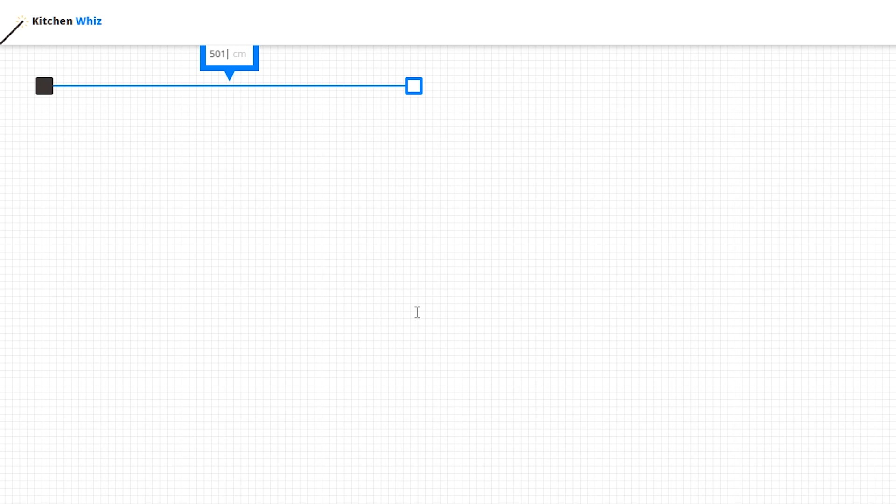Our room is bigger than 6 meters, so we are going with big scale. I'll click once, type the dimension of the first wall, which is 966, then click enter. The next wall is 621. Click enter and close the shape of the room.

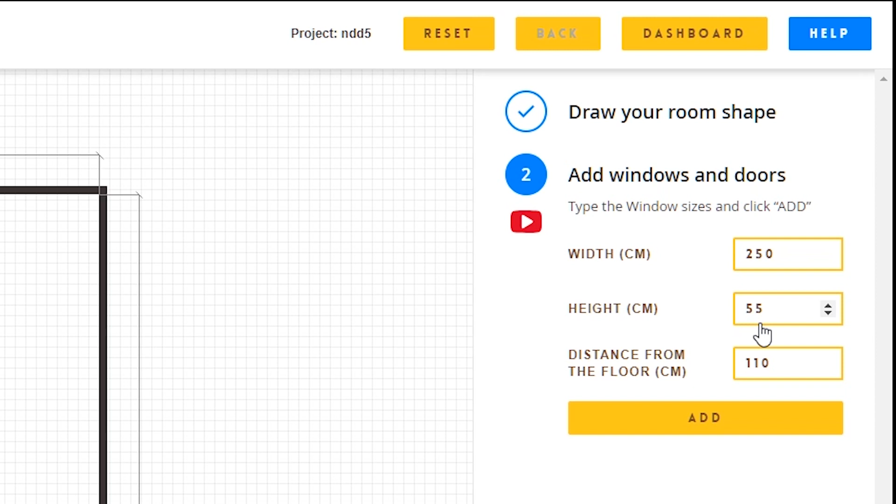Next, we're gonna add the windows and doors of the room. We have one window that is 250 centimeters wide and 55 centimeters in height, 110 centimeters from the floor, and it's 179 centimeters away from the wall here.

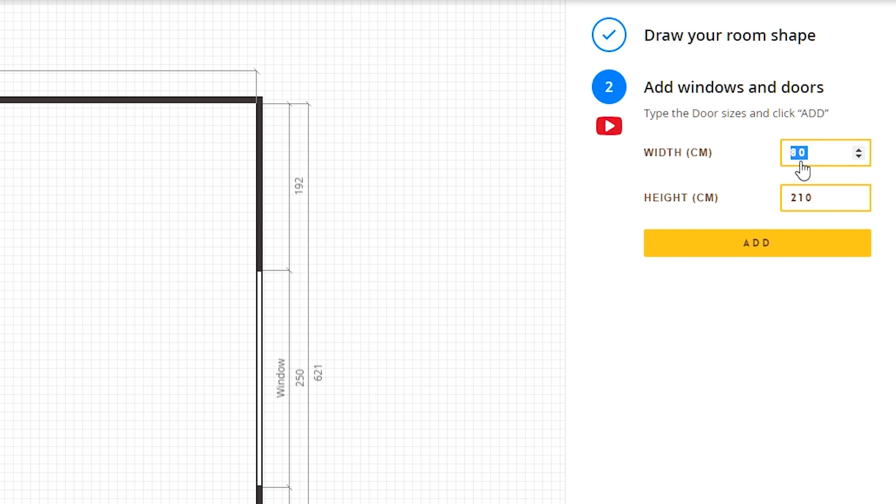Then we have two balcony doors on this wall. I'm gonna click create doors, click the balcony doors option, add 465 centimeters for width and 250 for the height, and place the one balcony door here. The second balcony door has the same dimensions, 465, 250, and I'll place it right next to the previous one. Click save.

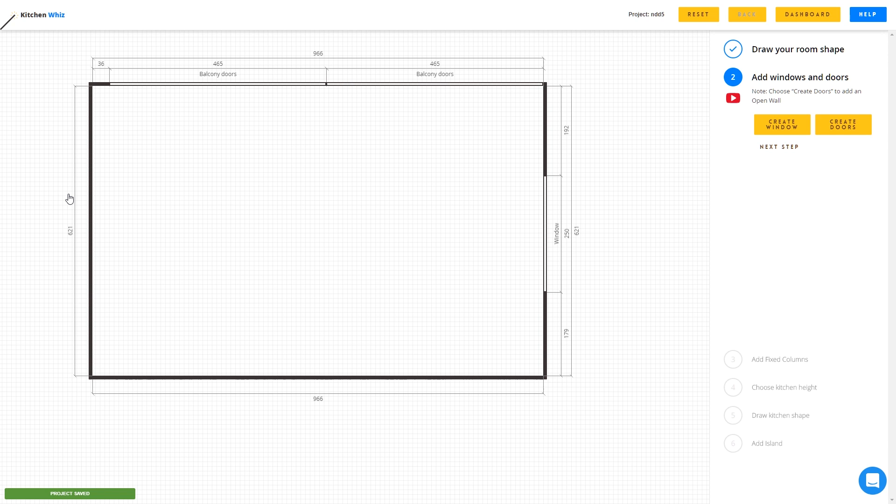I'm gonna make this into an open wall. I'll click create doors, click open wall, and add the dimension, which is 621 and 270, the height of the room. I'm gonna add the open wall here.

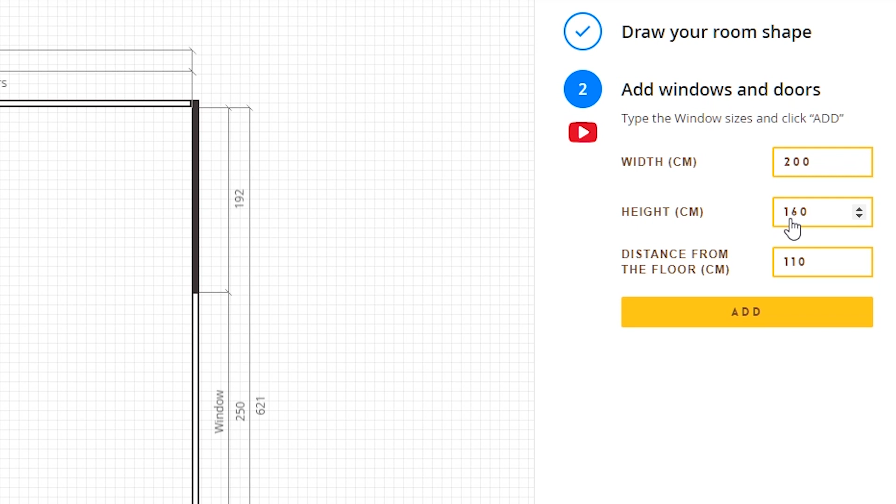Finally we have one more window that is 200 centimeters, 160 centimeters in height, and 110 centimeters from the floor. This window is 315 centimeters away from the wall.

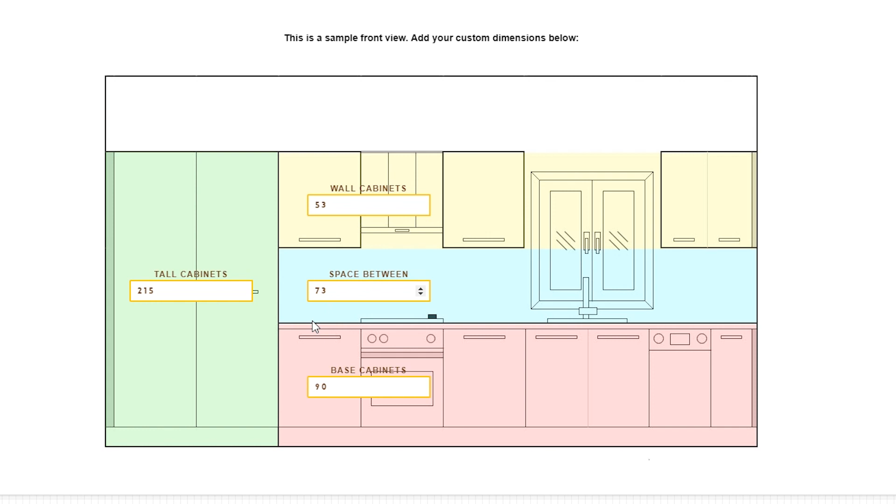We can now move to the next step. We don't have any fixed columns in the room. We're gonna go with custom heights for our cabinets. The wall cabinets are 53 centimeters, the space between is 73 centimeters, and the base cabinets are 90 centimeters.

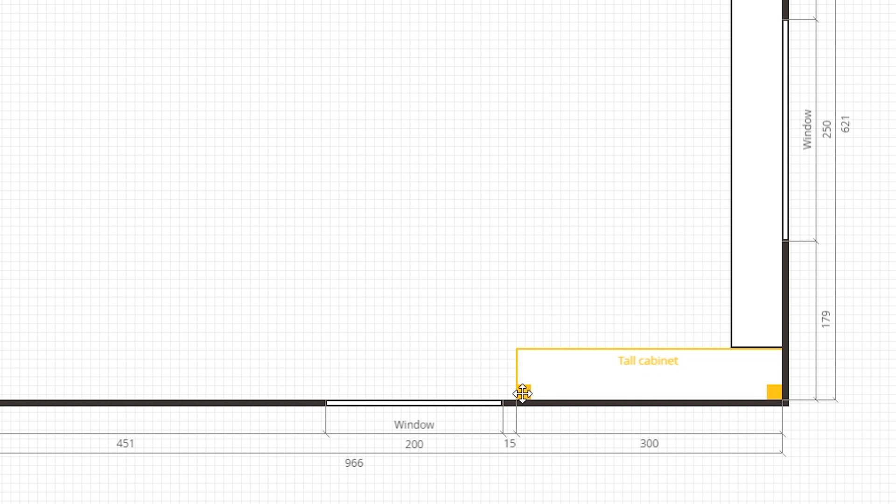I'm gonna click next and start drawing the kitchen shape. I'll start with the tall cabinets and then add base cabinets here, leaving around 1 meter from the balcony door. For the tall cabinets, I want to leave some more space here, and finally add the wall cabinets on this wall above the window.

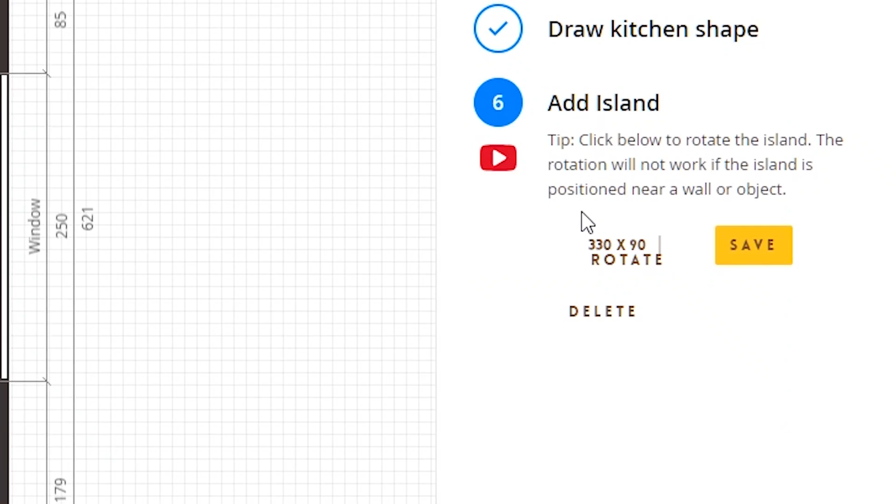Next, I'm gonna add one island that is 90 centimeters in depth and 330 centimeters in length. I'll rotate the island and place it here.

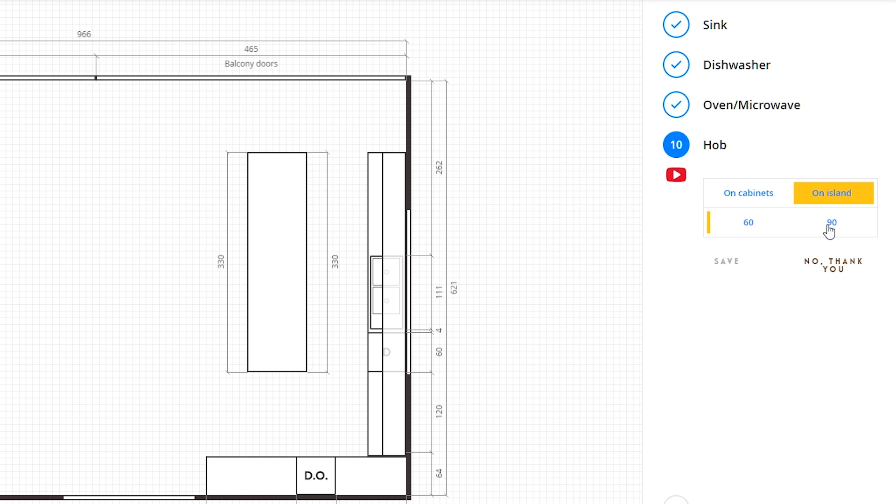Next, I'm gonna add the sink with two bowls right under the window, a dishwasher right next to it, a double vertical oven on the tall cabinets, a hob on the island, a hood right above it, and the fridge on the tall cabinets. By adding the fridge here, we get a red triangle, which indicates that the main appliances in the room are too far away from each other.

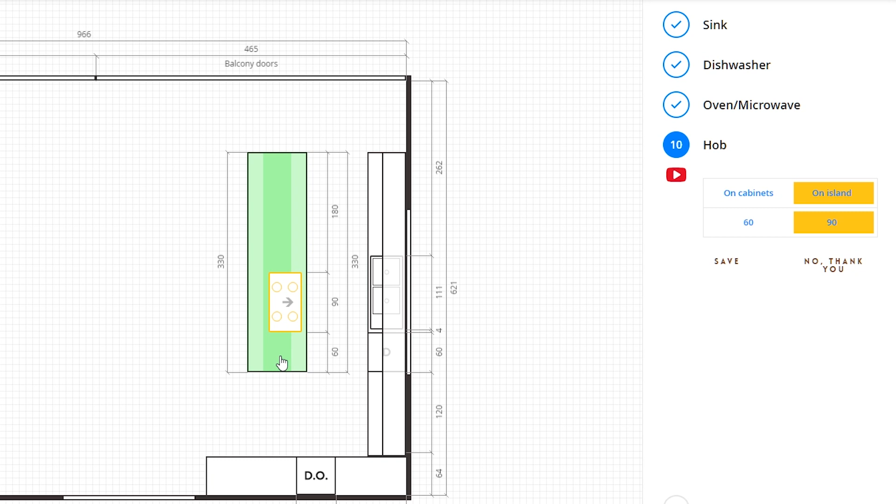So what I want to do is go back to the hob and move it a bit closer to the fridge, to the tall cabinets. I'll add back the hood, and let's try this again. When I move the fridge to the left, the triangle turns green and everything is in the correct distance.

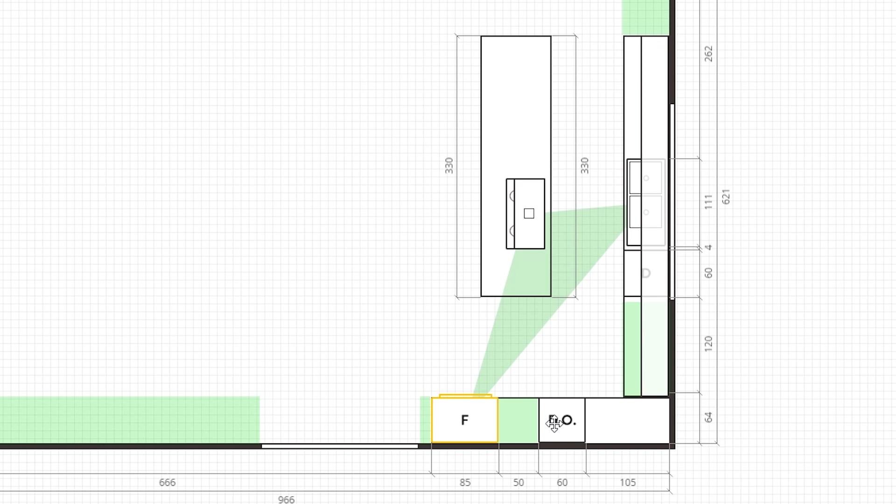If I place the fridge here, the space between the fridge and the ovens is 50 centimeters, but because this cabinet will be 45 and we want things to be symmetrical, I'm gonna move this 5 centimeters to the right, then click save.

I'm gonna skip the washing machine. Now our front views are generated and we can check them out with the minimap here.

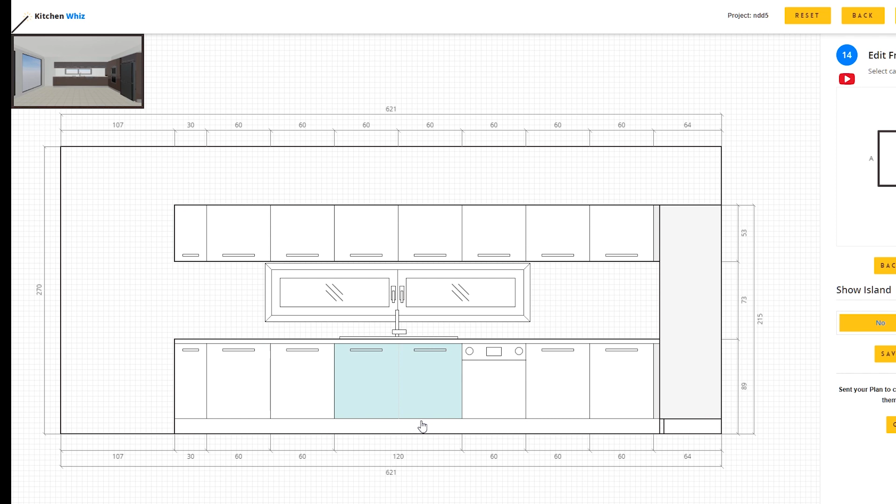The tall cabinets look okay, so what we want to do now is split and merge the cabinets here on this wall and then make this into glossy white for all cabinets.

First I want to split this cabinet in half so that I can merge these two and create a 90 centimeters cabinet, and do the same with this one to create a 60 centimeters cabinet.

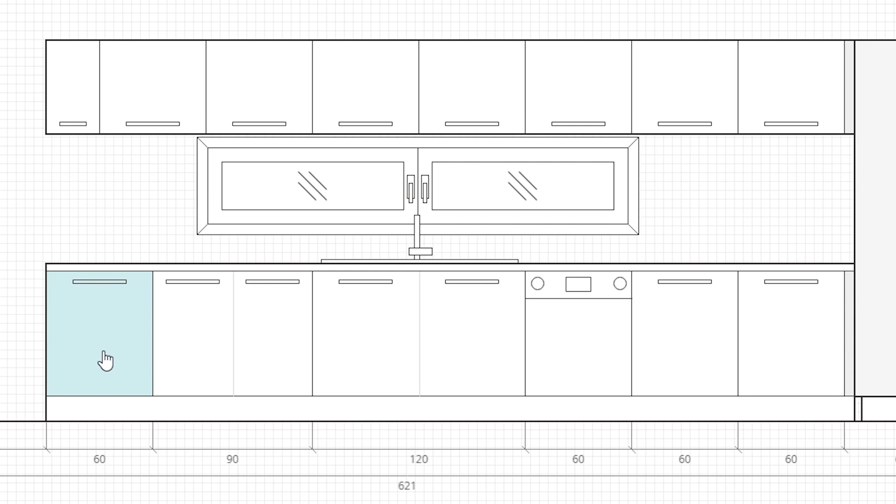I'm gonna change this to drawers and leave it with this type of drawers, and then all is left to do is split and merge the wall cabinets.

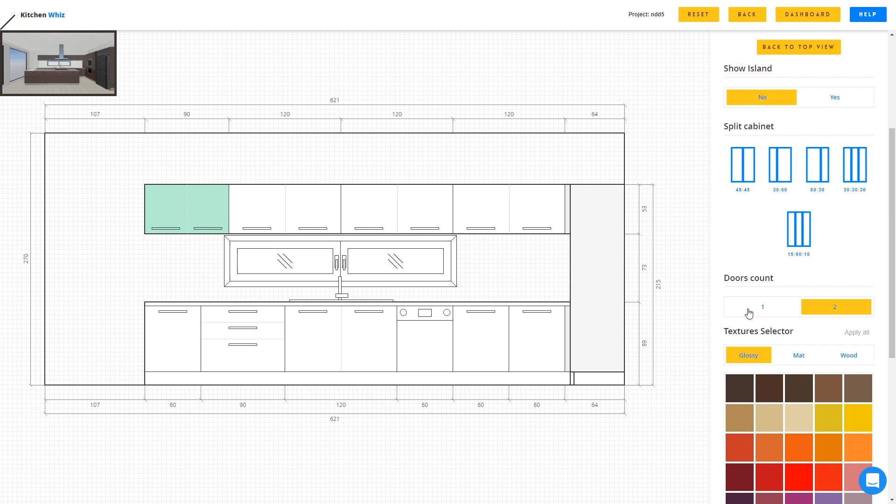I'm gonna merge these two, also these two, and these two together, and these two. Finally, I'm gonna change the handles on the cabinets to have one handle per cabinet.

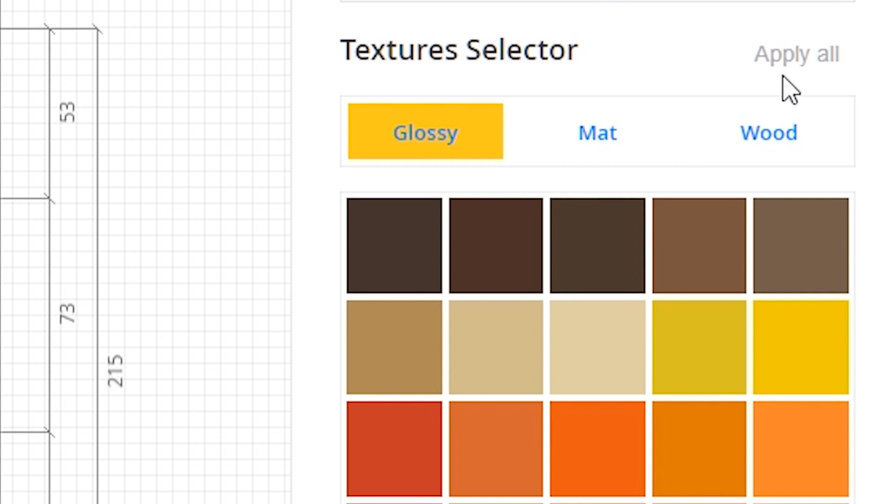And this is it. Finally, I'm going to click on one cabinet, any cabinet, it doesn't matter. I'll scroll down from the sidebar, make sure that the glossy surface is selected, click the white color, and then apply it to all.

And now our kitchen is in glossy white. What I forgot to do is merge and split the cabinets on the island.

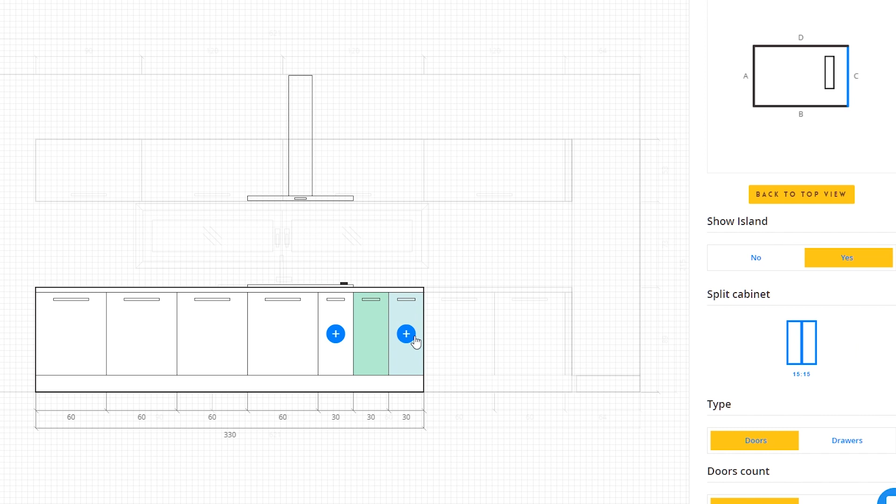So I'm gonna click yes below the show island section. I'll start by splitting this cabinet so that I can merge these two and these two. So I created a 90 centimeters cabinet, and let's see how this looks on the 3D.

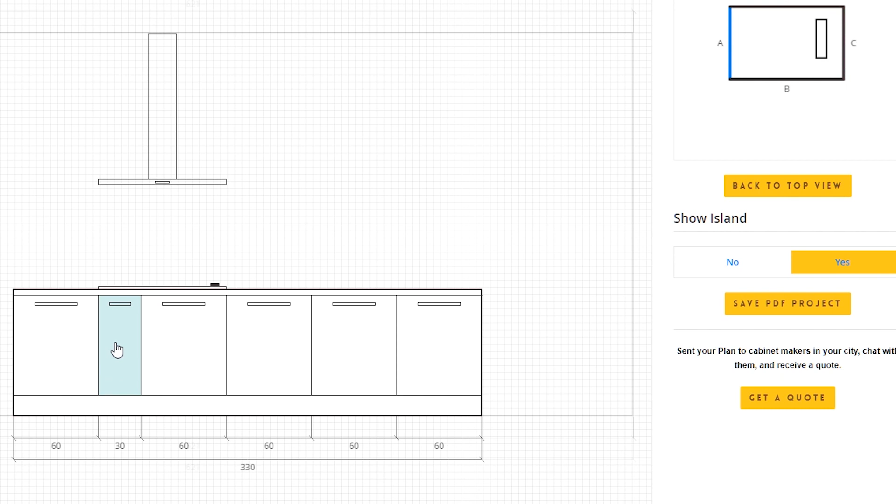I think it looks okay, so let's go on the other side by clicking the minimap. I'm gonna make the same change, split this cabinet, merge these two. I can change these to drawers into this type, and for these cabinets I can split these two and merge these two.

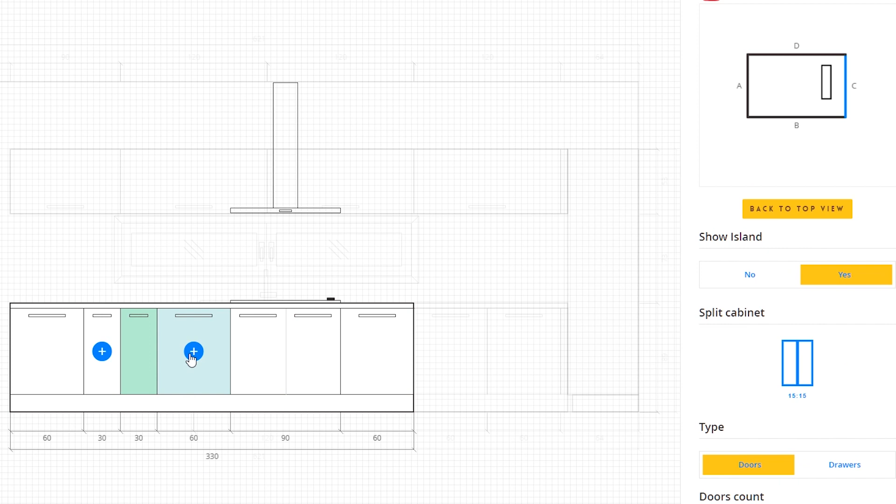So actually I'm gonna make the same for the opposite side. I'll split this cabinet and merge these two together. Now the cabinets look better on both sides.

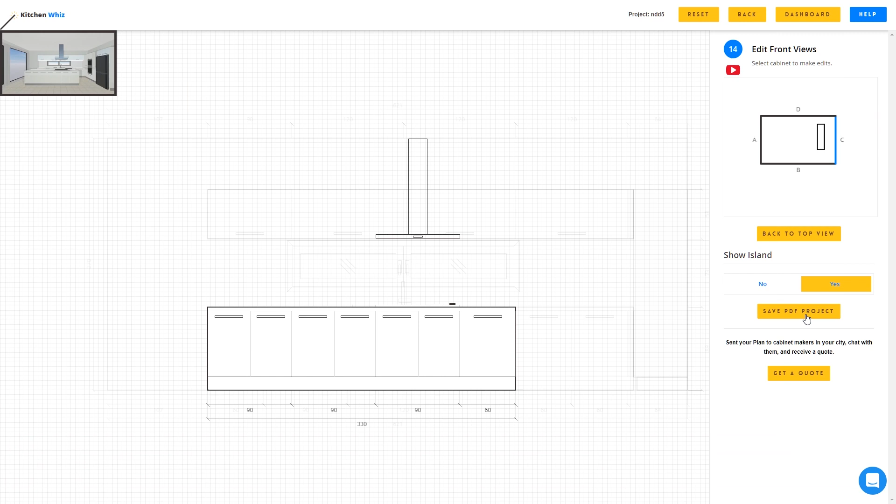And this is it, guys. If you want to take a screenshot, you can click here. If you want to save a PDF in 2D with all measurements included for all walls, then you click this button here.